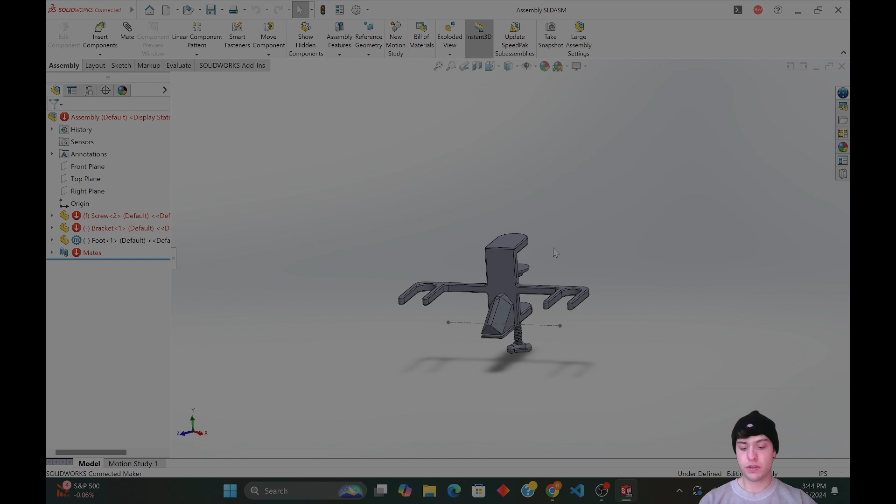Perfect, so we are going to clean this guy up today. One thing I wanted to do was make it look a little less awful in general. So really quickly and easily, we could just open this guy up and fix some of these features.

Big thing I was looking at was extending this fillet out to have some additional features. You could pretty easily just round these guys out.

You as well. You too.

It's probably not going to take to all of these. We'll see. Let's see what happens. And nothing, doesn't work very well.

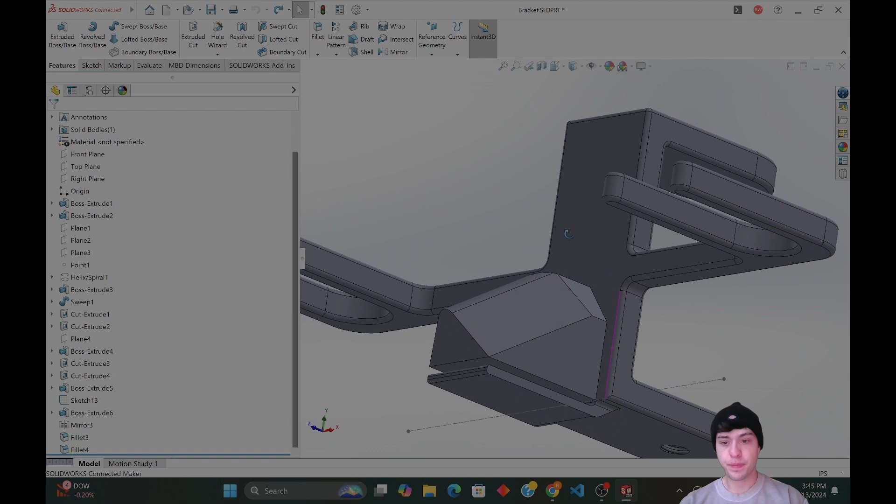So how about instead of editing that feature, we just make this zero, make it a little bit bigger. Then we can add, let's hide that sketch real quick.

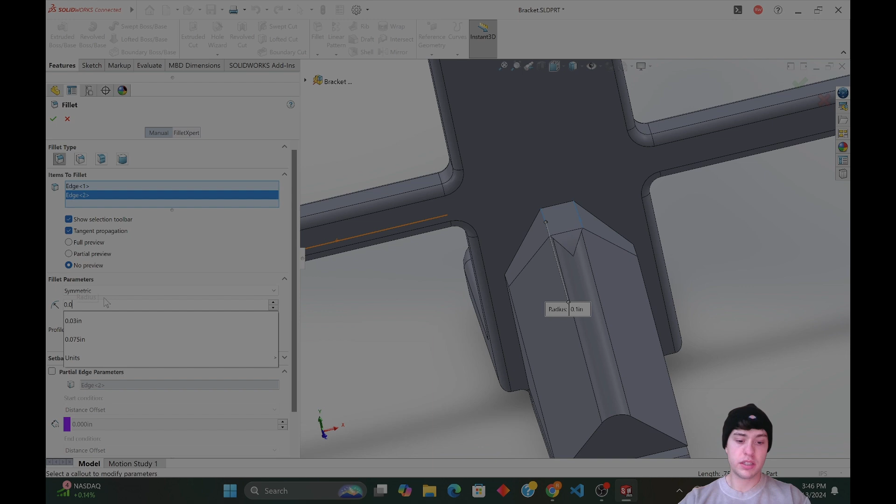I'd like to really round these out a little bit more. So let's fillet you and you, and let's drop this down to 0.075. Let's just see how that looks.

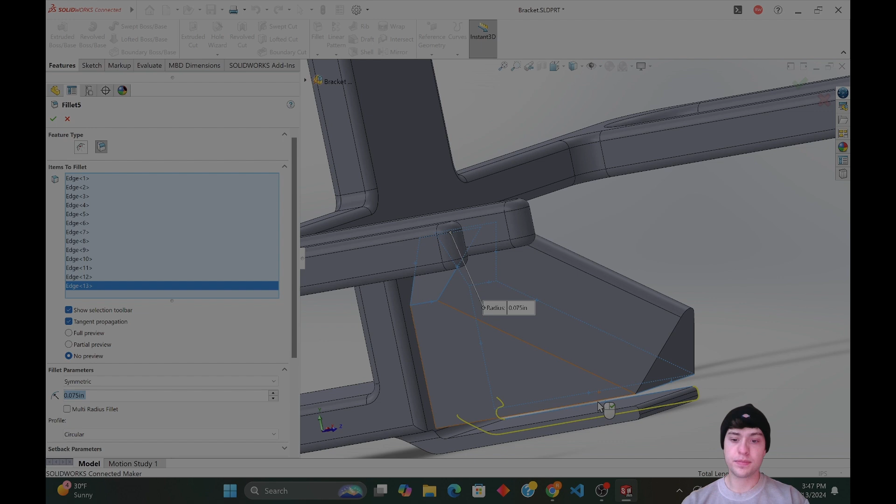See what that looks like. Common corner faces. Okay, so is it this thing that you have a problem with?

Probably these guys. I had to guess. Oh, we don't want that face. And this. Cool.

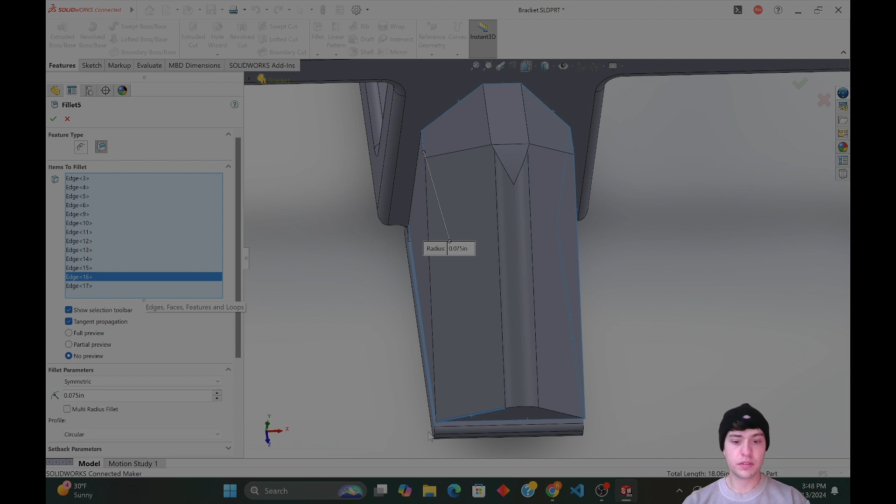Let's see if that works. Does not. Ah, turns out it highlights it. Ah, what happens if we do that? Does not like it.

Is that not about you?

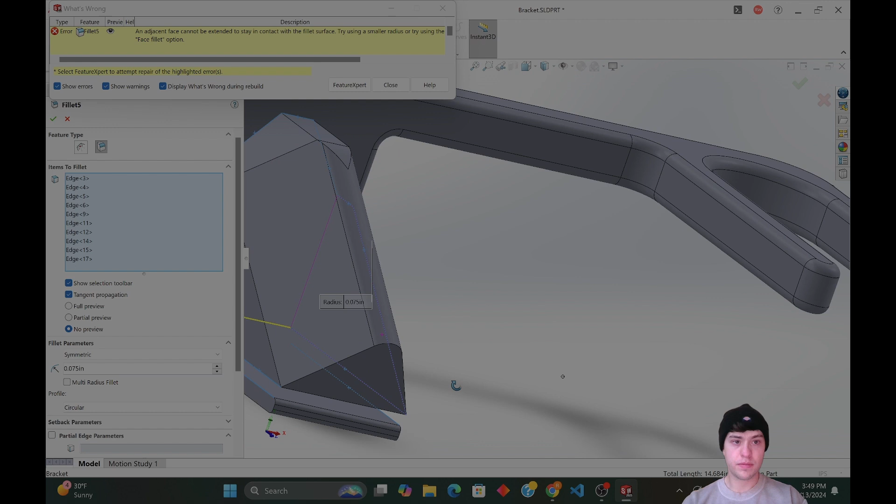Seems really picky. Well, scratch that, we're not doing that right now.

Maybe we can edit that geometry with our actual sketches. So those features were cut out here. Let's edit this sketch a bit.

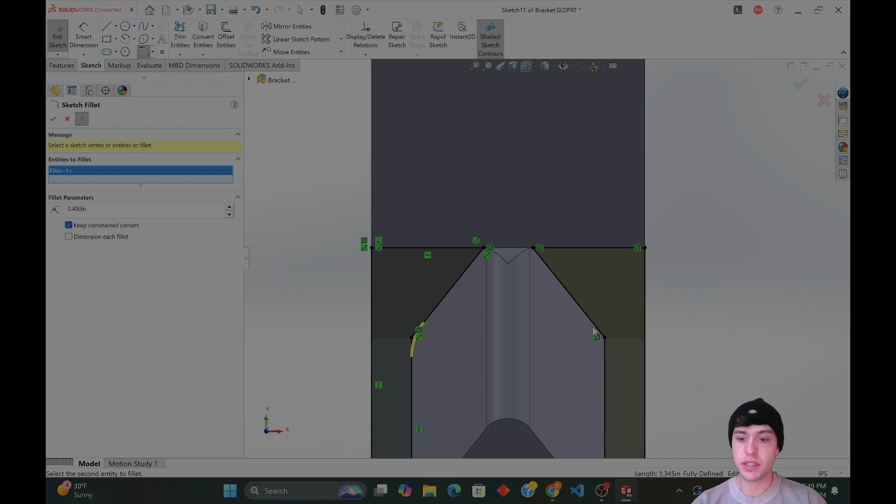Yeah, and we can go fillet right in here, between those two, spread out a bit. We'll add those, trim away. Oh, we don't have to trim anything. Kind of like that.

But also, I think I'm gonna do away with this geometry here. I think I'm going to kind of...

You two are going to be tangent, and you two are going to be tangent. Cool. And then we're going to do something like that.

So we actually want these to be tangent as well. I'm trying to smooth this thing out here. So then we'll drag our line. We'll trim this guy away.

Trim you, trim you, trim you. And then these are symmetric right now about that. Get rid of this coincident. And we'll just drag these two.

Actually, we can probably just say that these two are tangent. Oh, that's not good. So this and the origin need to be vertical. Cool, now we have an enclosed thing here.

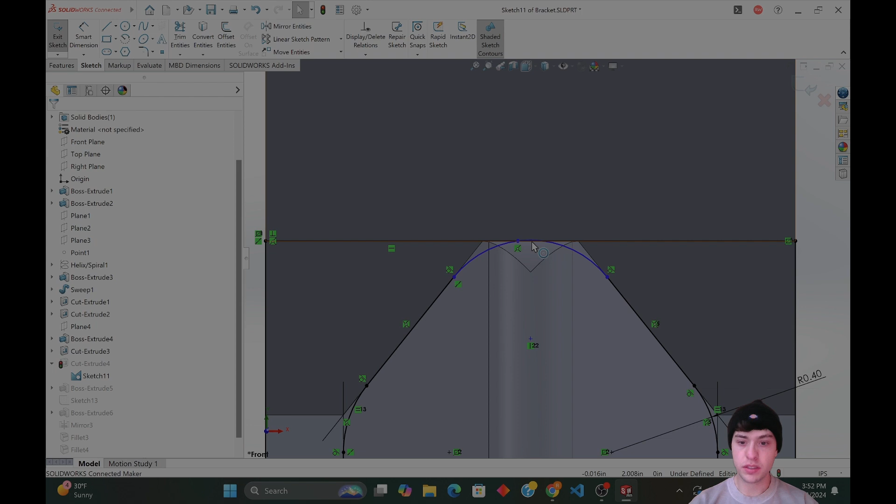Actually, I lied, I don't want this to be tangent there because I want to pull this away from this edge a little bit. They're no longer coincident. This thing is also going to be vertical with the origin.

You know what, why are we complicating things here? Just get rid of those and make this one line. And we can say that these two are going to be, sure, 0.45. Now if we go through sketch here...

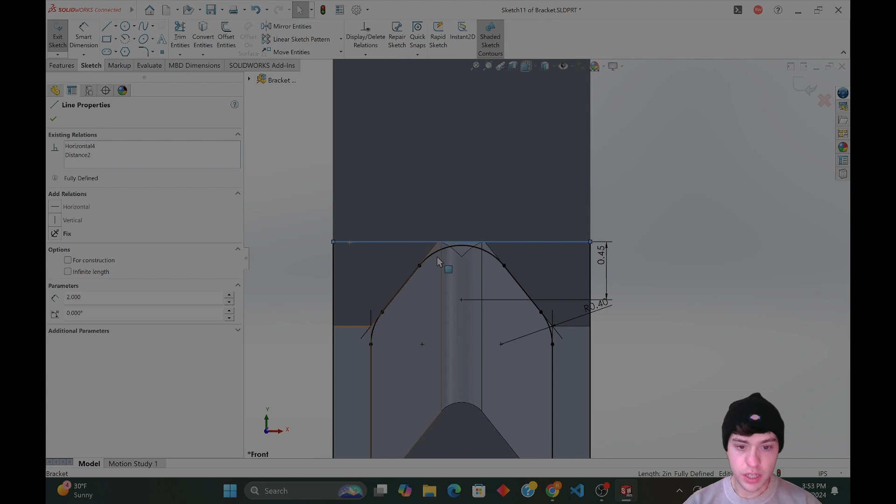We have... show me where the problems are. How much of this are we gonna have to redo now? I feel like a lot of it.

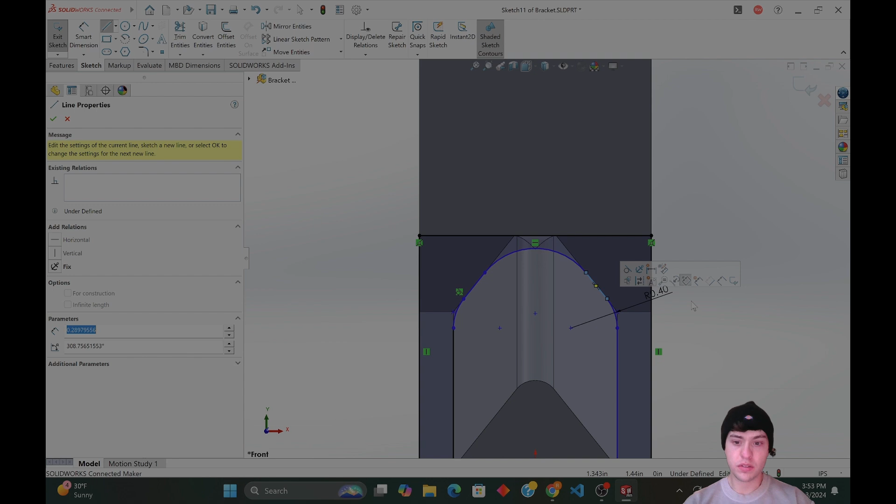That wasn't the issue. There we go, so there's just something weird in there somewhere. So these two are equal. And let's set this radius again, or this distance here, to 0.45.

Oh, that's not what we want. We also want these guys to be equal. That's not what we want. We also want, let's back it up right here.

So these two are going to be horizontal from each other, so that should lock that in. I guess I could actually make this really easy and do a center line here.

So I can say everything is symmetric about this, so you guys are all symmetric. Symmetric. You guys are all symmetric. Well, so now what is this mad at?

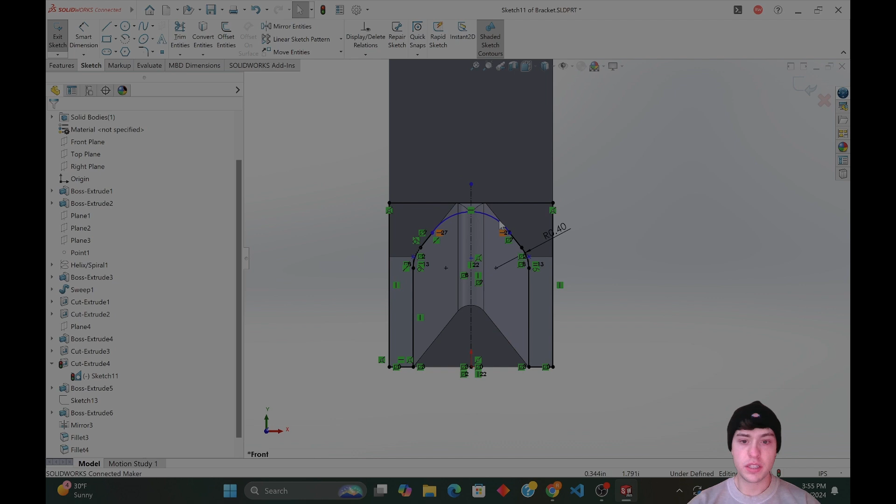We also need to make these lines collinear with these. So let's go collinear. That's all locked in. Cool, cool, cool.

These actually can probably just get deleted, they don't even matter anymore. And this thing, we can just make this pretty easy actually by just saying that these are tangent.

Cool, and it's still mad about distance. And we decided on 0.45. And it looks like it's not enclosed. So let's see what the issue is.

Well, I guess we have to go through this again. What if we make our lives easy. Oh, you're now collinear, and you guys are horizontal. Happy, happy.

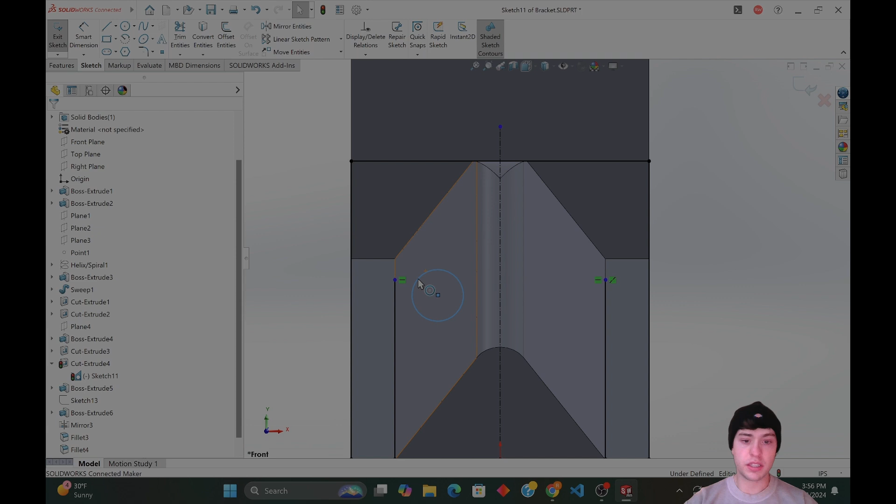This is going to be tangent to this, and here. This guy, you guys are going to be tangent. And then you're also going to be touching that thing. Cool.

And trim these away. And we'll set a circle here and make these tangent. Just before we forget, we'll make this thing collinear.

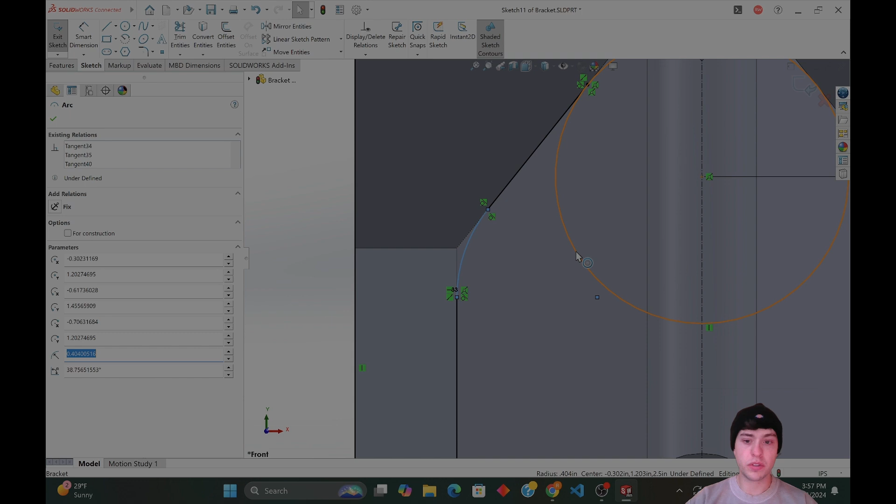And smart dimension this, 0.45. And you two should be coincident. And how crazy would it be if we made these two equal? Does it break everything? Not at all. Perfect.

Cool. So now we say mirror. We mirror you guys about, whoa. Mirror you guys about here. Wow, that took way too much work.

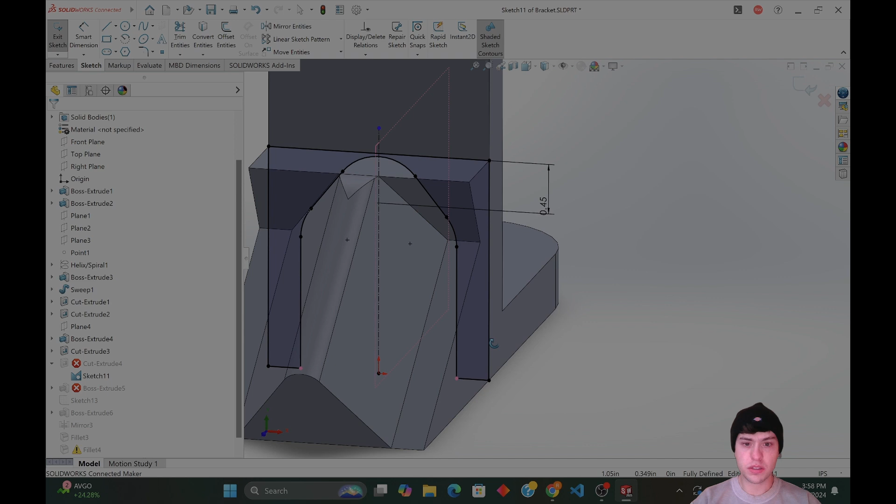We don't care. We do care. I wonder why this is still mad. What are you mad about? If you shrink this down a bit. Oh, no, a little bit bigger than that.

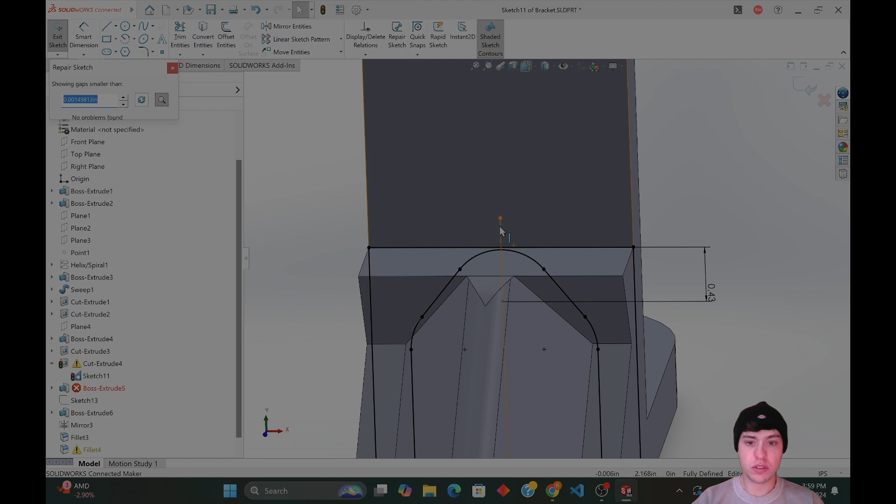This is mad. Multiple disjoint closed or single open. Where though? Doesn't help me at all if it doesn't say where.

This thing is freaking out. Okay. Do we even care? Do we even care to round these things out? It's hard to know.

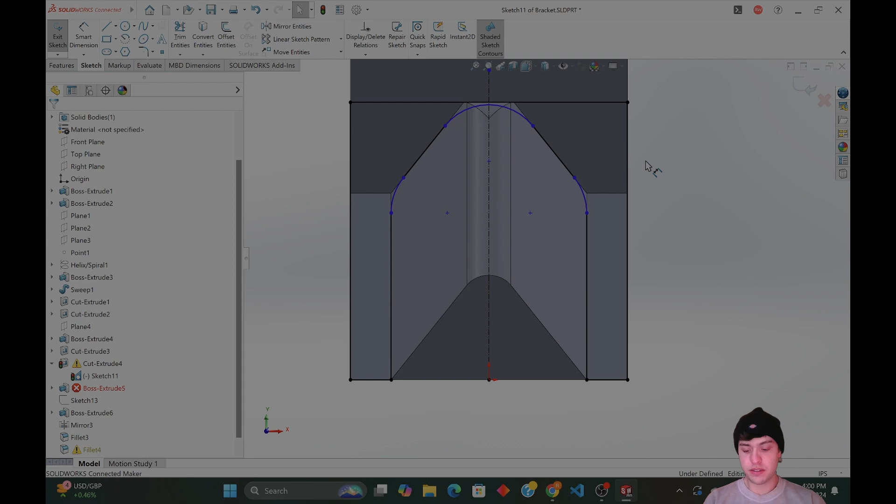Okay, I think I'm going to brighten this guy up a little bit. Let's go with filters, new color correction. We're gonna brighten you up. Sure. How bad does that look? Let's see.

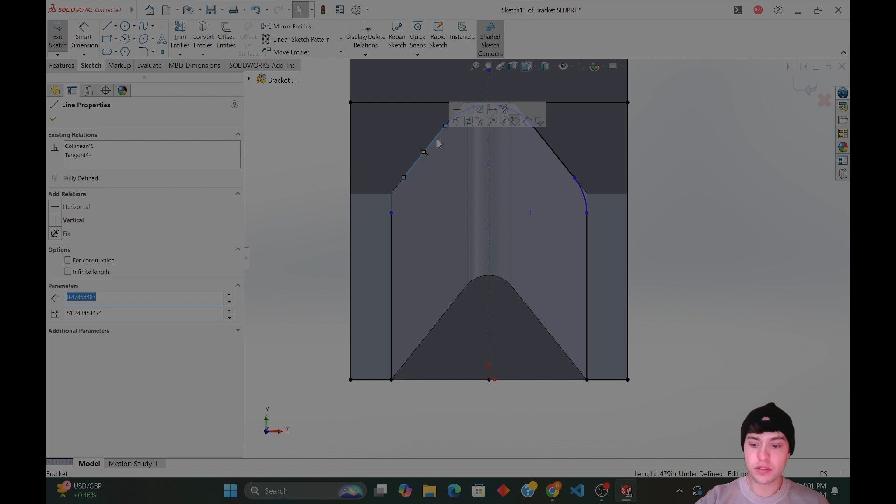Tempted to just do something crazy like this. And then make these guys and this guy coincident, and we drag this up.

You're enclosed now. What happens if we do this?

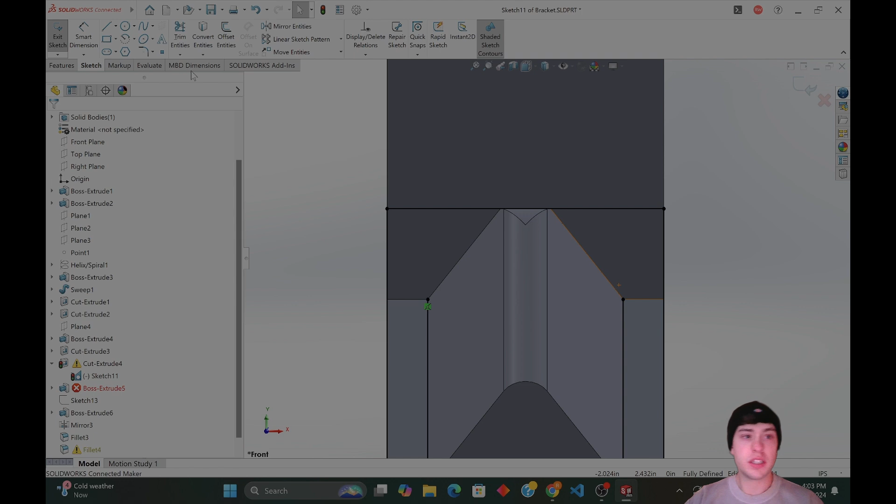Really doesn't make any sense. Okay. All this is a waste of time, I guess. Let's just go back to our straight line approach. If you touch here, we'll come up like this. Maybe we'll just do this.

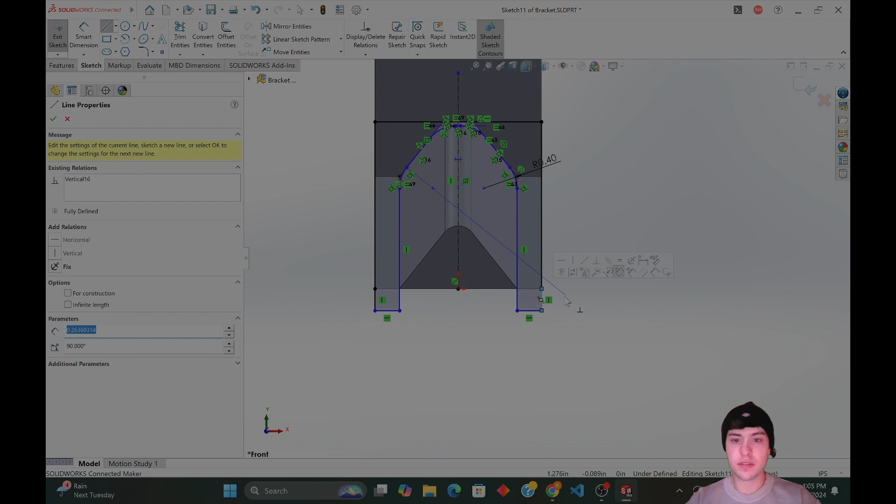If it was just the fact that these were not enclosed somewhere, we're just going to be extra careful here. See if that does anything. Do I have anything?

Okay, we're just not going to save this. We're going to reopen it. So I still don't fully understand what's happening.

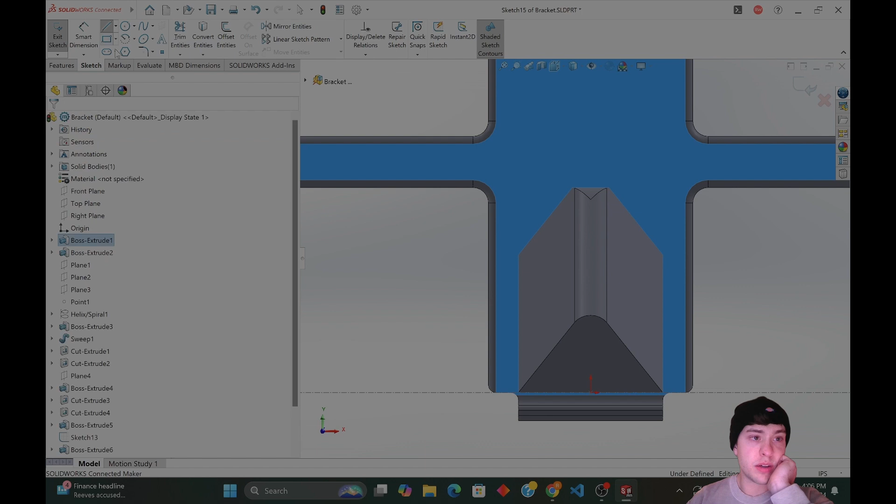So instead of dealing with that headache, what I'll do instead is be lazy and sketch on here and trim away the extra stuff that I don't want to deal with. So we'll do the same thing we were doing before, a rectangle in from like here to here.

And then we're actually going to trim away this guy and put some lines in. Vertical. You're going to be, you, and you are going to be collinear.

And we can do this now. We will actually get rid of this and do what we were attempting to do before. So again, I think the easiest way to do that is to make all of these on the sketch here, horizontal.

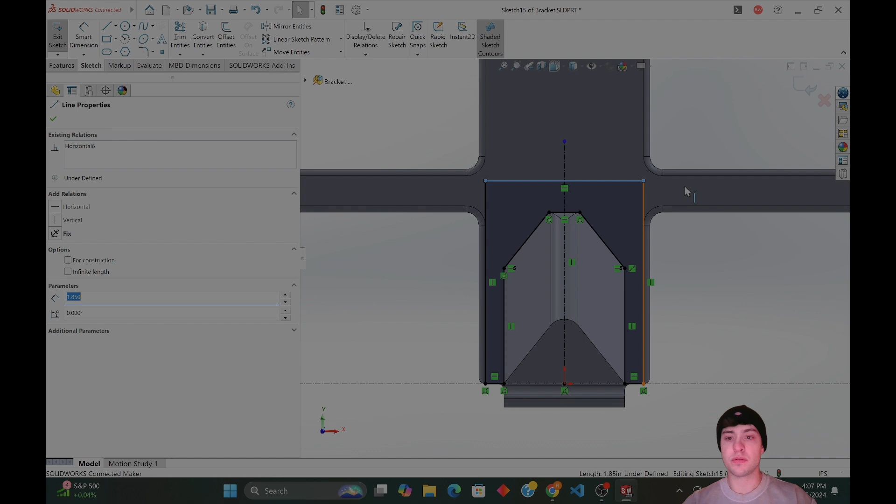Same thing. I actually don't care about this dimension at all because there's nothing on his face that's going to interfere with it, so I'll kind of just leave it for the time being. And then we're gonna, oh, that's too big. Let's do 0.1. Get rid of this line.

Maybe 0.2. Maybe 0.3. Sure. And then we should be able to, now we should be able to shoot a cut and get rid of all the garbage that I want to get rid of initially.

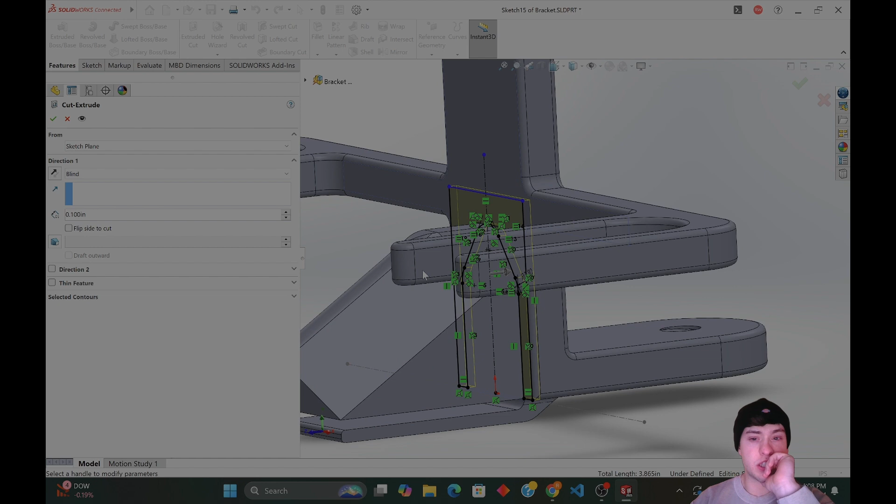Cool, and we'll flip the direction and we'll go up to vertex. Pick that guy. That's cool. So that rounds that out nicely.

And I wonder now if we can just throw the fillet that we want to throw on before. What does that look like? Cool. I actually might increase that size a bit, and we'll select some other contours here. See if it gets mad at us now.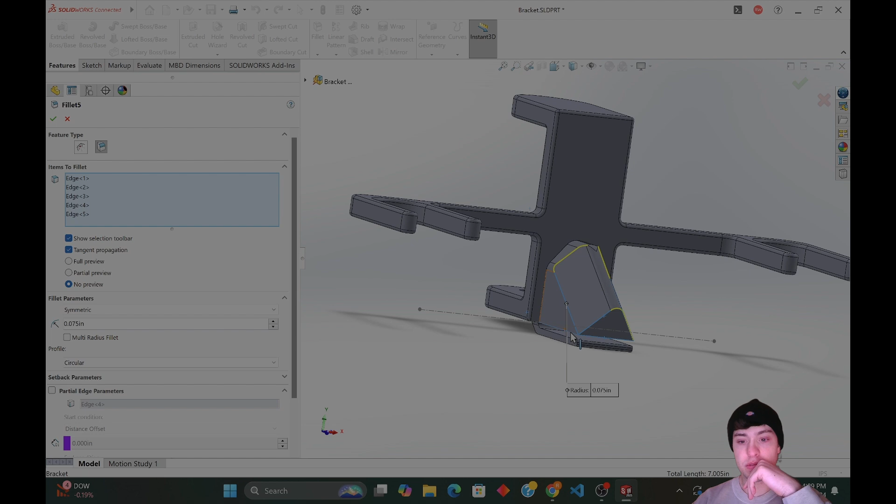Make that 0.1. Is it mad? It's mad. Okay, so we won't select these edges. Then we'll see what happens. It's really upset about... what feature is it mad about?

Okay, whatever, that can be a flat face. Not super worried, I'll grab this guy too. Cool. Cool, cool, cool. Okay, I'm not mad at that. So that's cleaned up a bit.

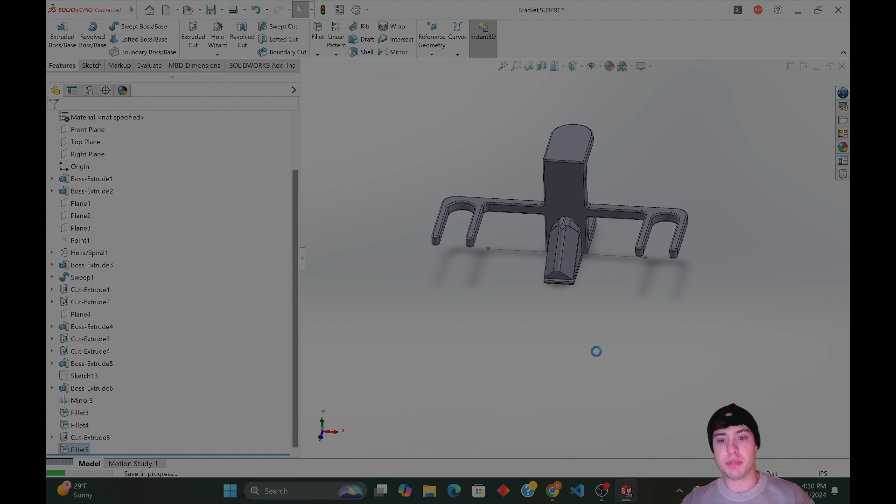One thing I was thinking is that I am not sure how I feel about this being like... so the idea is that the nose rest of the mask of the MetaQuest 3 will grab onto the surface here. So I don't know how I feel about that just being kind of like a friction hold, because the second I bump that or shake my desk for whatever reason, it could fall off possibly.

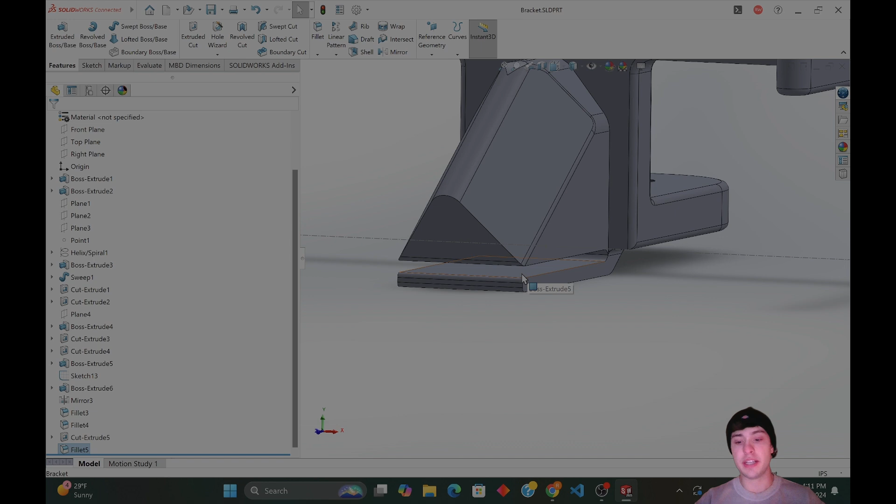Unfortunately, I don't have my Quest with me, but we'll mock up some solutions to that. I actually think that if this is dimensioned correctly and the strap for the headband is set at the right length, this should provide enough friction force or downward force on the mask to hold it in place. But maybe we don't want to rely on just that.

So I know the mask is this wide. This is my reference line for the size of the mask. So what I'll probably end up doing is making some little tabs here, almost like little detents that grab the side of the mask.

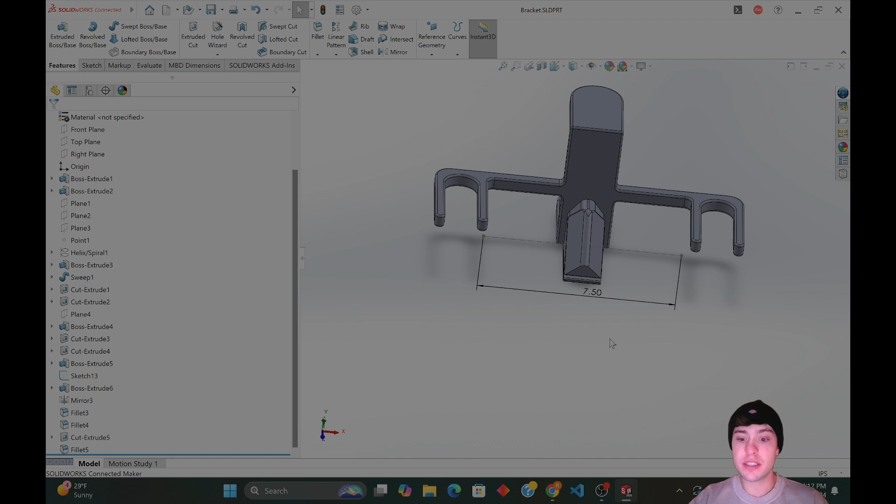Or maybe we don't even care, and we double check that our screw geometry looks good, and then we'll test print things. You know what, I like test printing things. So let's go to our assembly.

We'll rebuild our assembly, clean that up a little bit. Everything looks a little bit nicer. I'm still kind of happy with how this foot and clamp design works. Realistically, I could... oh, you know what, that reminds me, I actually did have something else I want to change about this.

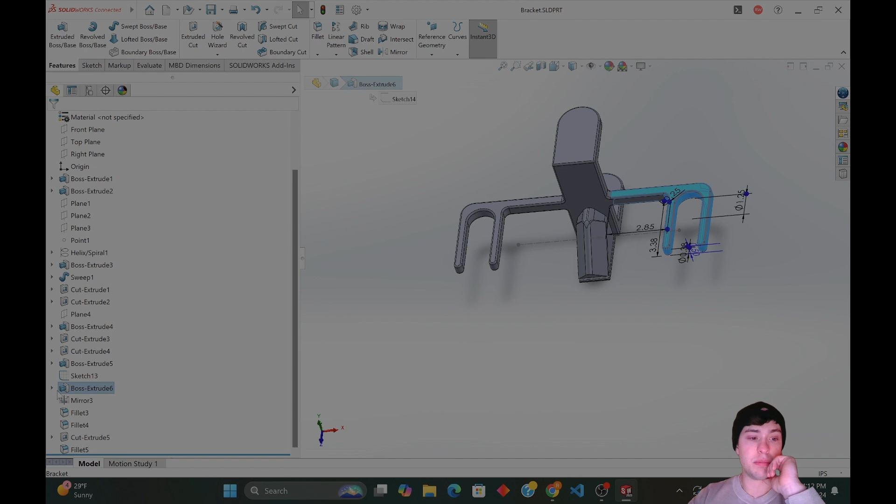I want to taper these a bit. Those little arms there should be tapered because I don't want this when I mount the controllers inside this arm. I want it to guide in nicely, and I don't want to have to press the button down as I press the thing in. I want this tapered so the button on the controller presses as I insert it into this slot.

So what we'll do is, what angle do we want this to be tapered at? What we can do, I think, is just make a vertical line, and you are going to be vertical, cool. And then we'll have an angle that's guided off of this.

Let's dimension this thing at an angle of, let's say, a 5-degree taper. Nothing crazy. If everything is designed correctly, I have all these set as vertical right now, so I should be able to get rid of all the verticals and tangents. Actually, we keep the tangents.

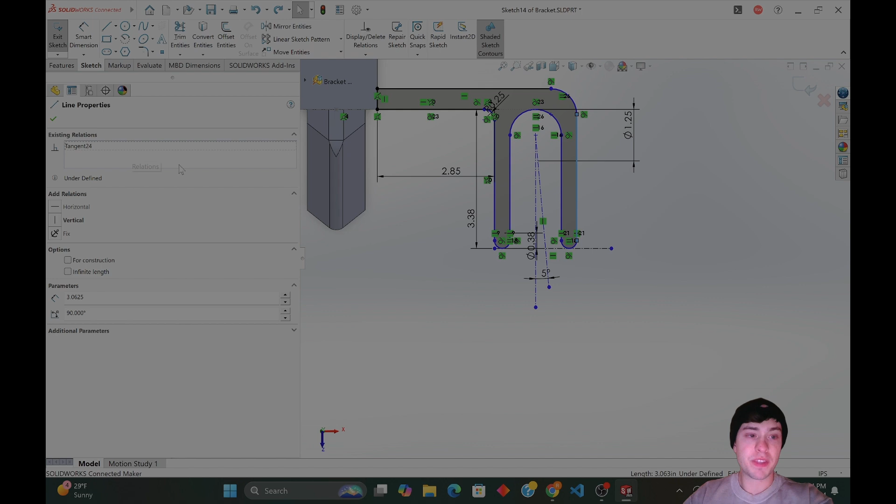We'll get rid of all the verticals. Oops, not the line, the verticals. So these lines should no longer be vertical. And what I can say now is that if I throw a center line in here, this thing should... oh no, we don't want to do that.

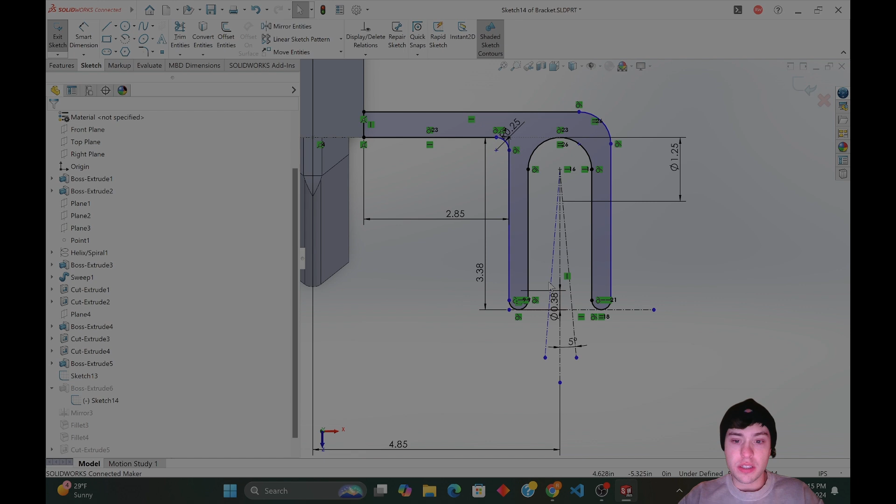So let's dimension this off of the origin. Works for me, that's dimensioned off the origin. Let's say that tangent, tangent. It's this intersection—oh, that intersection's gotta go. Now I should be able to say that this is symmetric.

Is there a way to add a relation to... oh, that's how I want this endpoint and that endpoint to be symmetric about that line. Cool, so now we have our 5-degree taper. And if all goes well, I'll probably have to delete this dimension and make sure I just define this.

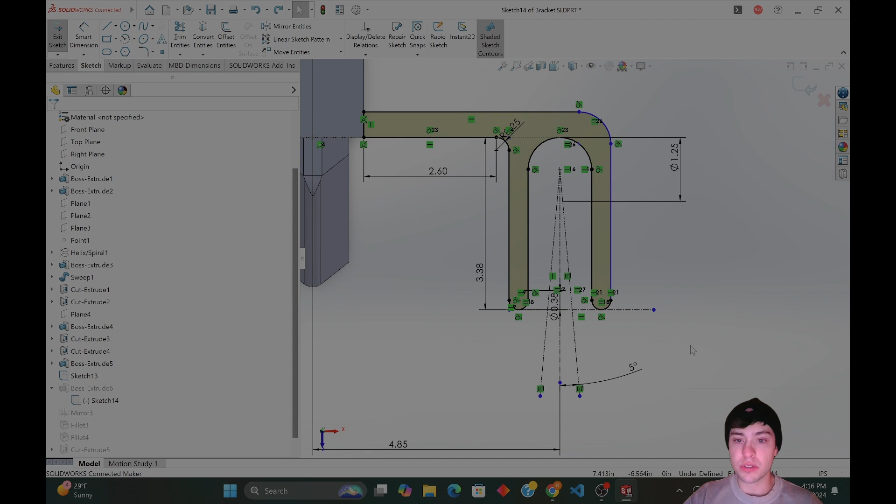And what happens if I say that these are parallel? Everything breaks. Cool, so something's over constrained here. We'll delete that. Cool, delete that for now.

Now you should be tangent to this. What is tangent? And this guy. Cool.

So now I can probably go here and say parallel. And this is also going to be parallel. What are you parallel to? Why are you not parallel to you? Why are you mad at that? What relation does this have? Or are these symmetric?

Now we know that this thing can't be tangent with that if we want this to look right. So, can I select 3 at once? I can—parallel. Cool, so I'm kind of happy with how that looks. It's a jumbled mess right now with relations.

So just for some background, some rationale behind why I do everything the way that I do: as a wee young engineer, back in the day when I was doing my first internship and job doing mechanical design, I would never drive anything based on relations. I would always dimension everything. But I think the intuition you develop by setting everything to be dependent on relations to each other, like tangent or equal to or symmetric about, gives you a lot better design intuition.

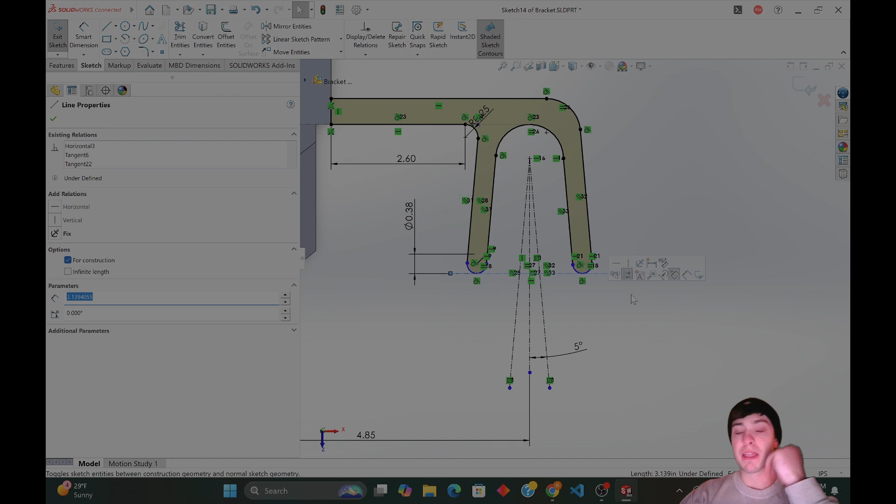So you don't need to be super explicit with how you define things, so you can be more rapid. If all these things are related properly, now I can set up a system where I can really quickly make modifications to one portion of my design, and I don't break everything else in my design.

The worst thing to do is to design a full assembly like this, and then go into one of your parts where everything is explicitly defined and not related to your other drawings or sketches. If you change one thing, it could break several things down the line, which is kind of what you saw when I was trying to fillet this edge. You want everything to be related correctly.

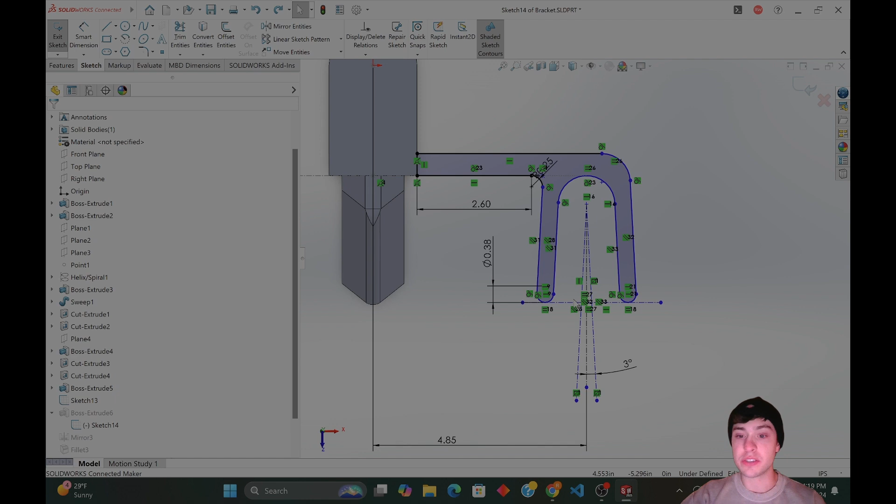So now that all this is related nicely, I can just change this value and everything updates accordingly. I can, in real time, look at this and say, oh, I kind of like... not what I want to do. I could say, oh, I kind of like what 3 degrees looks like, which is true. I do kind of like how 3 degrees looks. And this distance here, while it's not defined, I think we can kind of guesstimate.

Let's say it's 3 inches. That's probably even a little too much. So let's say 2.5. Um, I lied, we're gonna do 3, because why not? Cool.

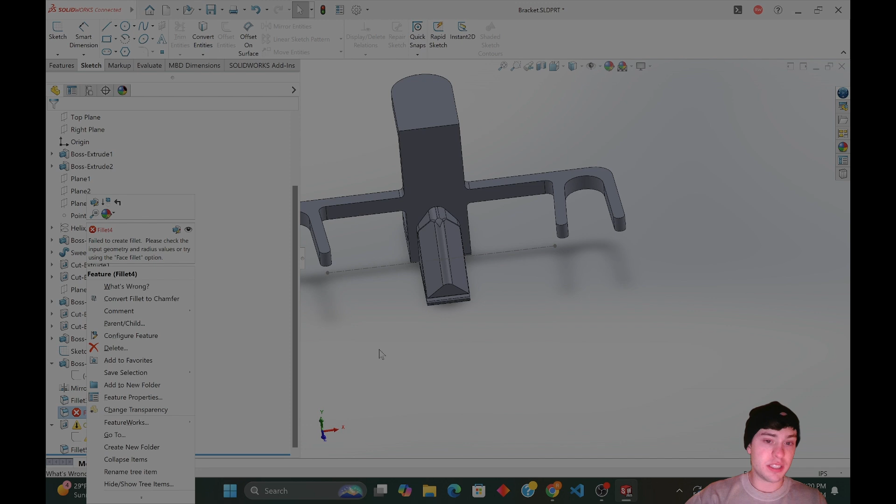We broke a fillet, as I mentioned before—we do all this so we don't break fillets or other features—and we broke the sketch. This fillet is probably dependent on a face that we just changed. So if I edit this, it's gonna tell me, ideally, what it doesn't like.

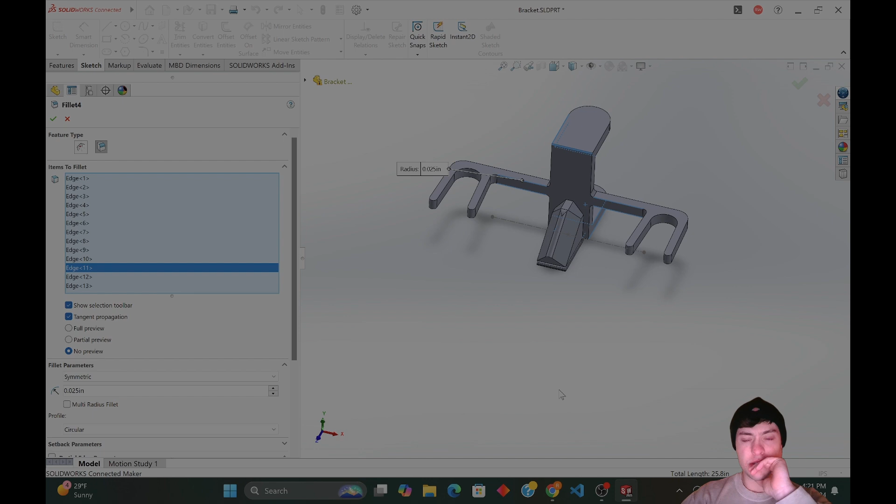I think it's because... let's try reducing the fillet size and see if that unbreaks it for the time being. All right. Instead of really trying to unbreak this thing, maybe we can pull it down, can't reorder.

So what is broken? Let's try deleting some of these—not those. Let's try deleting, just incrementally delete faces or delete edges until this is happy. Let's see if this is causing it.

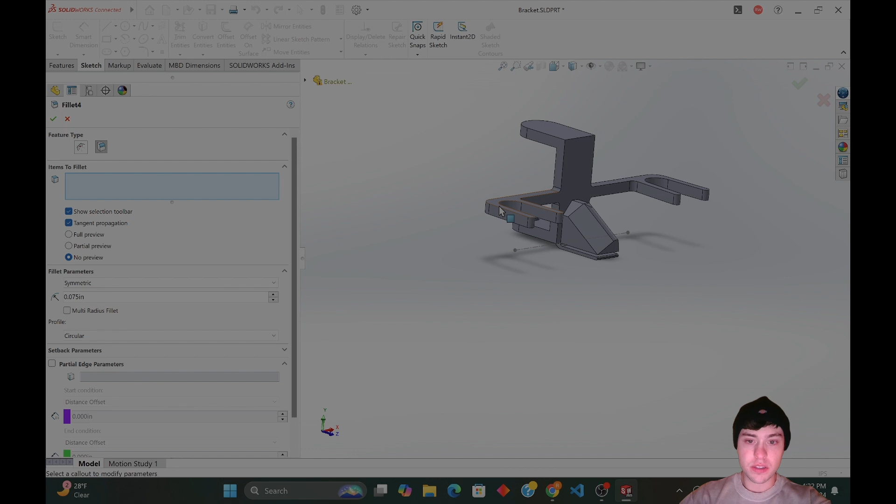Bingo. So why are you mad now? Oh, okay.

So instead of the edge, we'll select these faces. Works for me. And then grab you, you, grab you, and we'll grab you. I believe that was everything we had done before. Nope, we missed this.

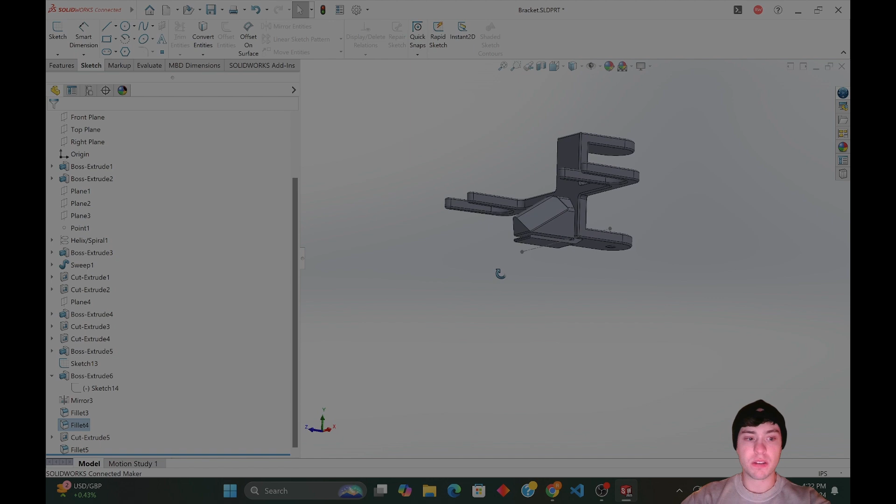Sweet, so now we're kind of where we left off, and I'm a little happier with that. So actually, what may end up happening—again, because I don't have the Quest with me to grab these dimensions—but maybe because of this line, I actually think the Quest is just about 7.25 inches long or wide, if I remember correctly.

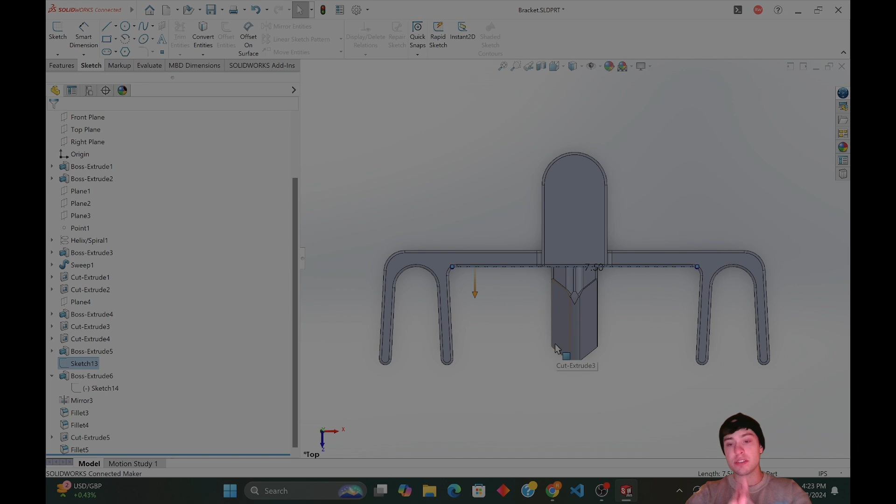What may happen now is these little tabs here, these little fingers that are meant to grab the controller, may also work to compress against the sides of the Quest and retain it, so you kind of snap the whole thing in place. We won't really know till we print this thing, but I'm kind of happy with how that looks.

Let's see, we might as well select a material on this, because we know it's going to be PLA. Do they have PLA? They do not have PLA.

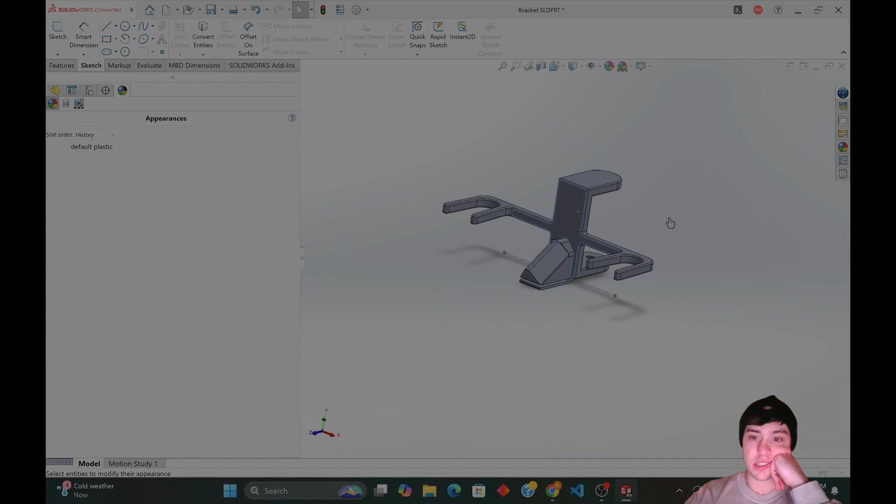So I only care about this for an aesthetic reason. Let's just select a similar looking plastic, which normally Nylon 101 is pretty similar looking. And we'll adjust the appearance—just the appearance of, I think, this whole face we should be able to do.

What do they have here? Texture? Ooh, I kind of like these, something like that. Okay, actually, instead of just doing that face, I should be able to go here and edit appearance. Ooh, now we have a nice, pretty, kind of gloss black representative view of our bracket.

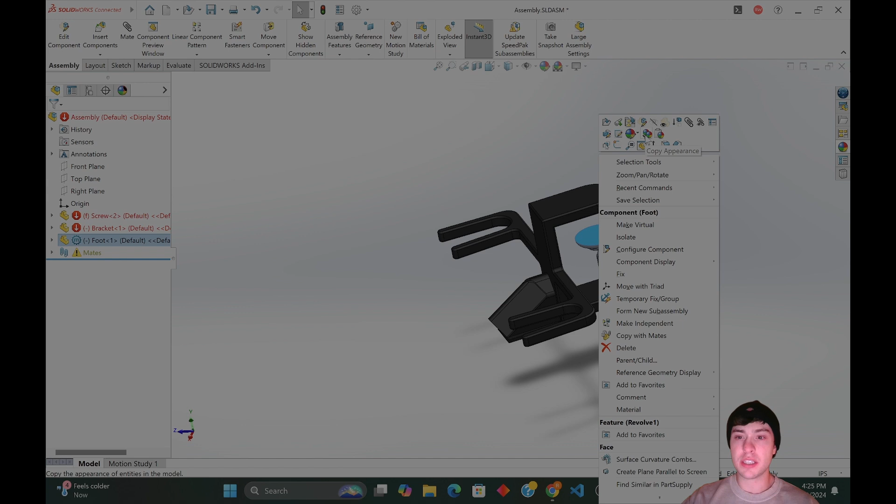Save that, go back to assembly, and modify the appearance of these things. So I should be able to go copy appearance and paste appearance. Maybe not... paste appearance. Ah, there we go. Bingo, so this is actually what this will look like.

Pretty close. So now that that's a little bit cleaned up, what other things can we add? I really should take another look at... let's see, right click. Let's do a section view of this. And select.

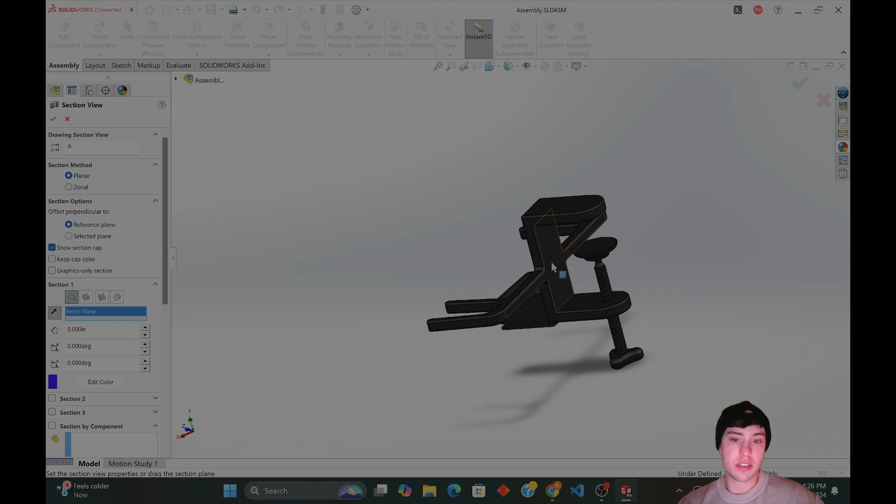Oh, our position got all mixed up. Okay, what mates do we break? Concentric.

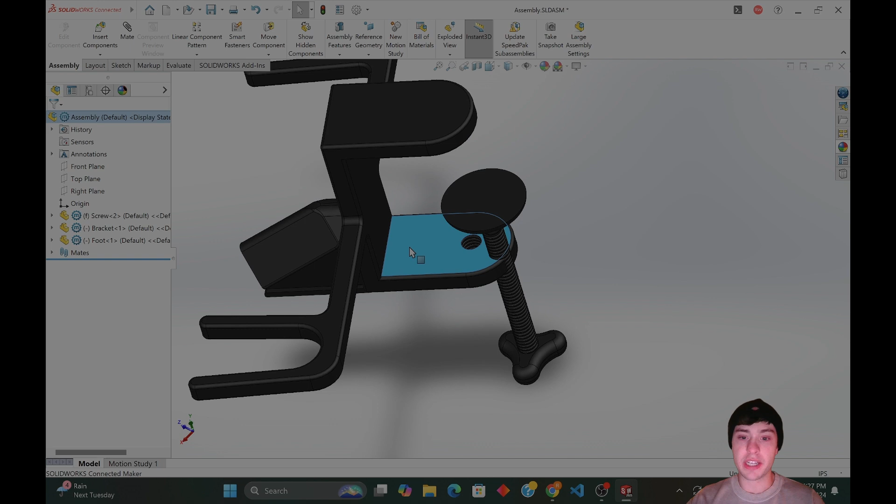So we know what we can do to ensure that our screw is properly centered relative to our threads, just to do a visual check on whether or not our threads will mesh correctly, as we can say that this guy and this guy are concentric. Unfortunately in our model we won't be able to move that around anymore, but I just want to check to make sure that our threads mesh up well, because we did design these threads ourselves.

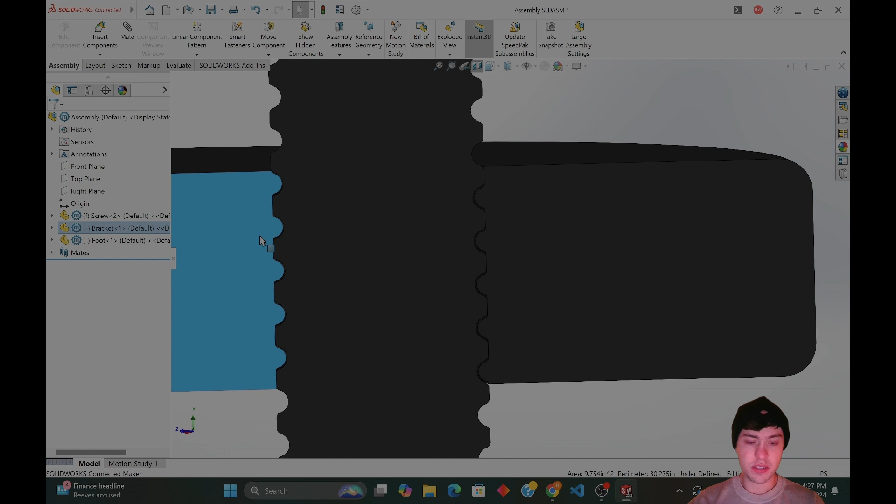Let's flip you around, I want to see. Let's zoom in here. So, yes, one thing I did want to do, because that's line to line right now, that's a big problem. And I think that's what's causing that. Yeah, that's what it is, it's because it's line to line. So that's an issue, and I'm glad I remembered that we did it that way, because that's stupid.

So what we can do in our bracket here is we had this hole cut, which I think we can just pop in here and say, instead of being a half inch, you're going to be 0.51. So now this is 10 thou wider than the shaft, the major diameter of our screw thread. Major diameter is, let me just check features, where's my rebuild button? Rebuild and save the document.

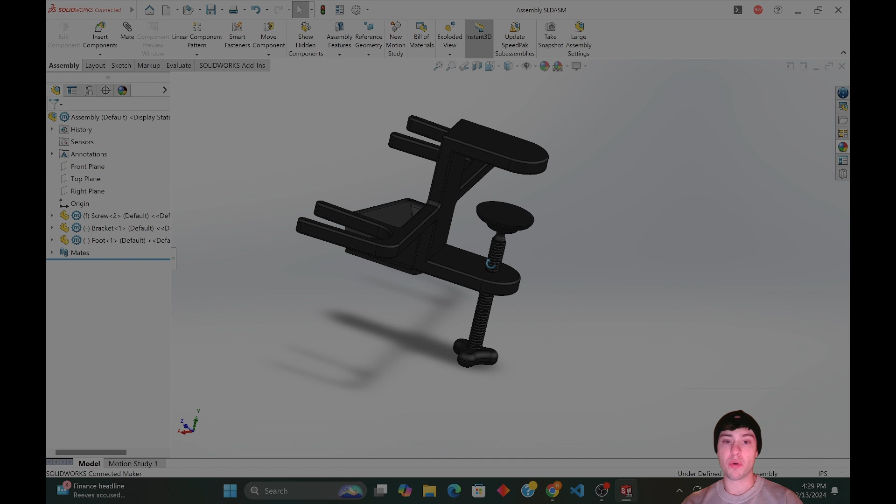Okay, if we go on our assembly, I can show you what I'm talking about. So before, how this was set up was that the maximum diameter of this thread, the edge of this profile, was the same diameter as the mating surface of the receiving side of the threads. So that means that because nothing is made completely perfect, even if it was, you're going to be having those two faces ride against each other as you drive these screws into place.

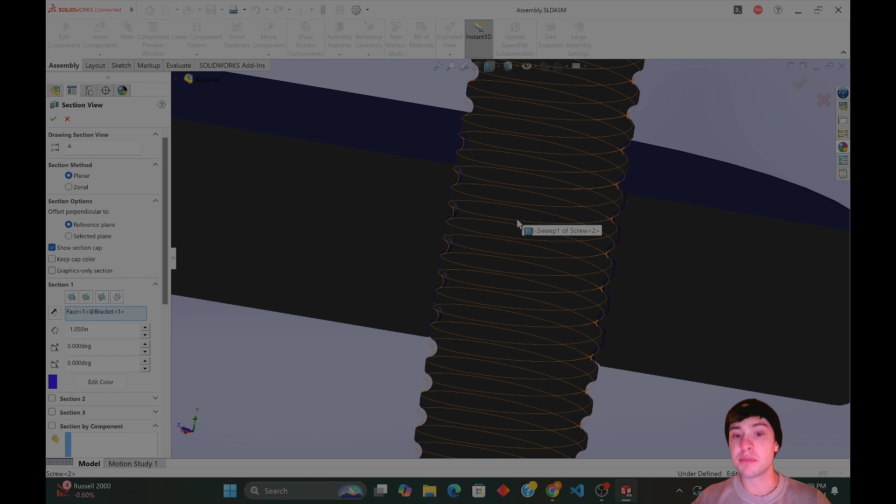Again, 3D printed, we want to keep like 5 thou tolerance minimum, especially with the kind of 3D printing I'm using. There's SLS 3D printing that's a little bit more precise, but I'm just using an extrusion based, I believe it's FDM 3D printer. So that's just a little nozzle with some hot plastic coming out the tip of the nozzle, and it goes around and traces the path of the print.

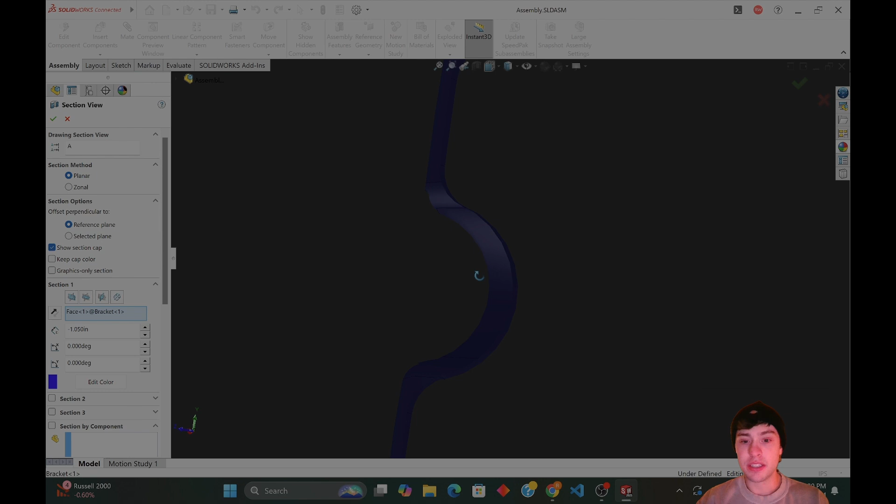So I actually left a 10 thou gap here, and what I actually want to do now, since I increased that gap, is figure out if I'm actually okay with having these radii be different. I think what I want to do is make the radius the same, because everything in the bracket for this thread is driven off the diameter of the first extrusion.

So I may be able to go in here and say that this sweep, let me edit the sketch, wherever the hell it went. Yeah, okay, let me go normal to, what face is this? Where's my... there we go.

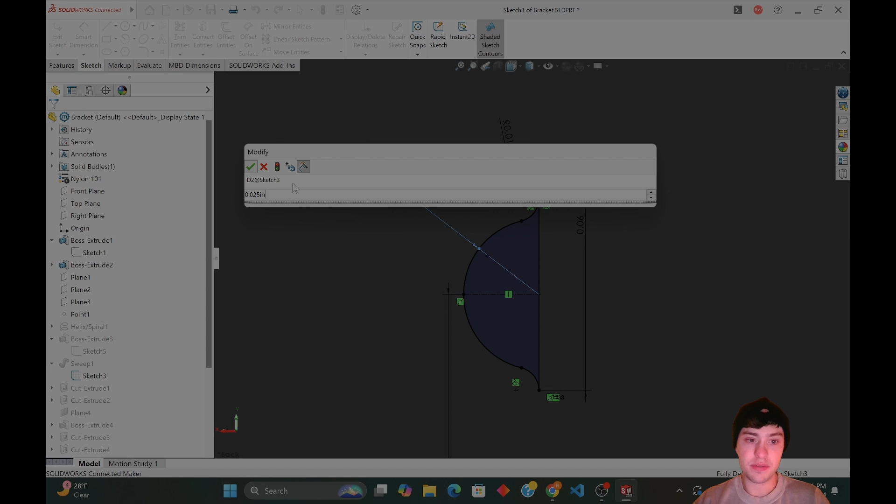So now we can say that this radius, because we made it a little bit smaller before, I believe it's, was it 2.5? Let's just double check. I want to open this part. Okay. Oh, 0.03, 0.027, okay.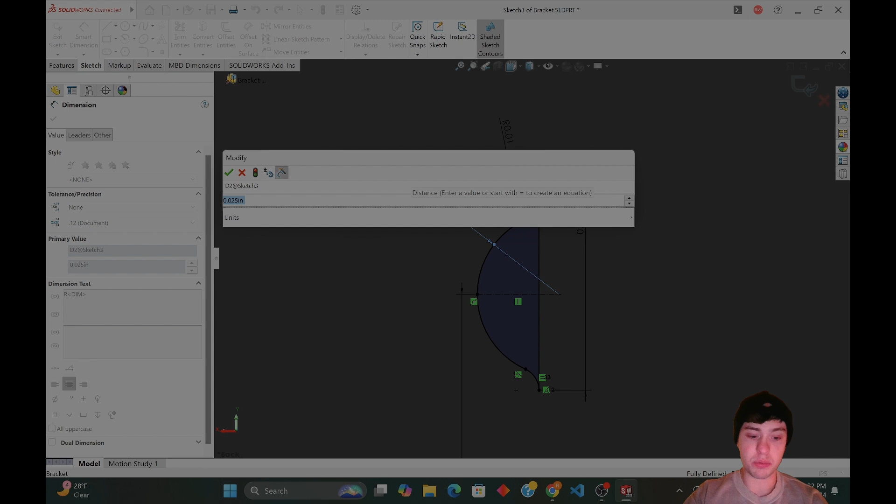So if that's 0.027, I'm actually pretty confident we can make this 0.027 as well. And hold on a second, you need to be a whole lot bigger, and as do you. 0.027. 0.012. So that's going to be 0.02.

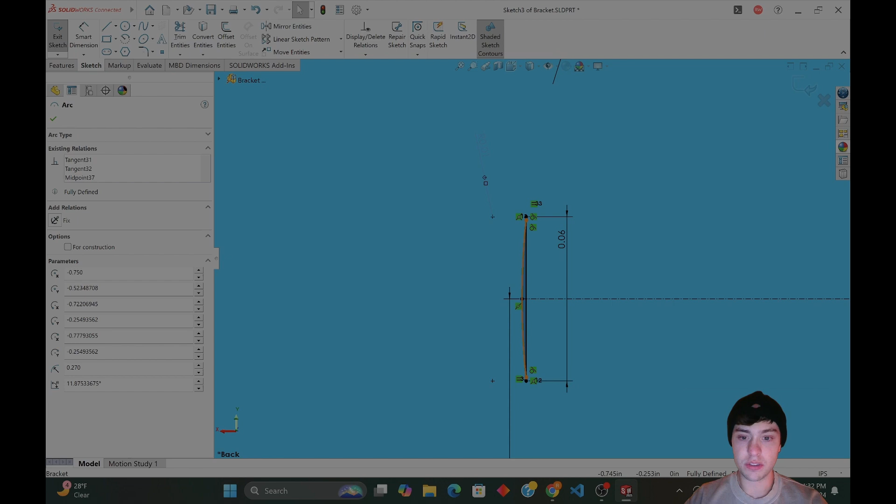So this is all kinds of screwed up. Whoa, yeah, we need this to be 0.027, not 0.27. Fix that, why did that not update? To 7. Cool, so now I'm pretty confident that if we go back in here, you just make sure that these guys are saved.

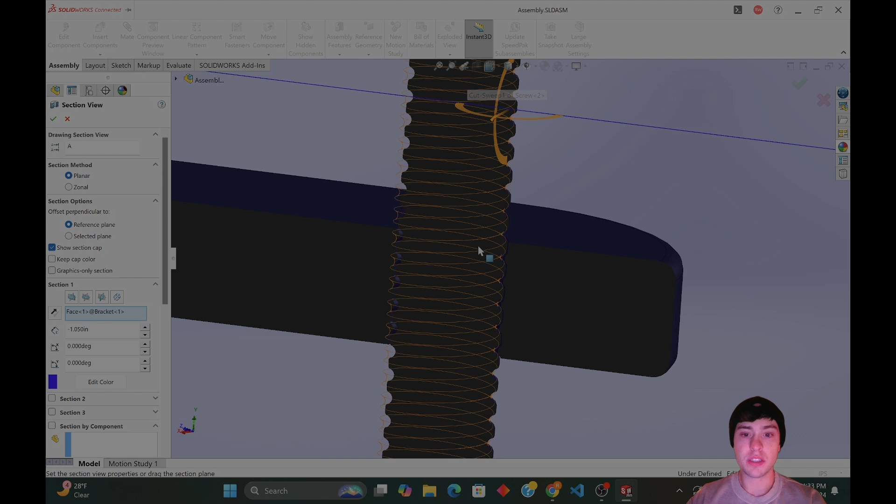Now if we go back into this assembly and we go back to our section view. Something looks a little funky there, I think we need to increase that line length. So that's something that we have dictated on the bracket that is not dictated on our screw. Do we have this 0.0274? How bad is it if we just copy paste?

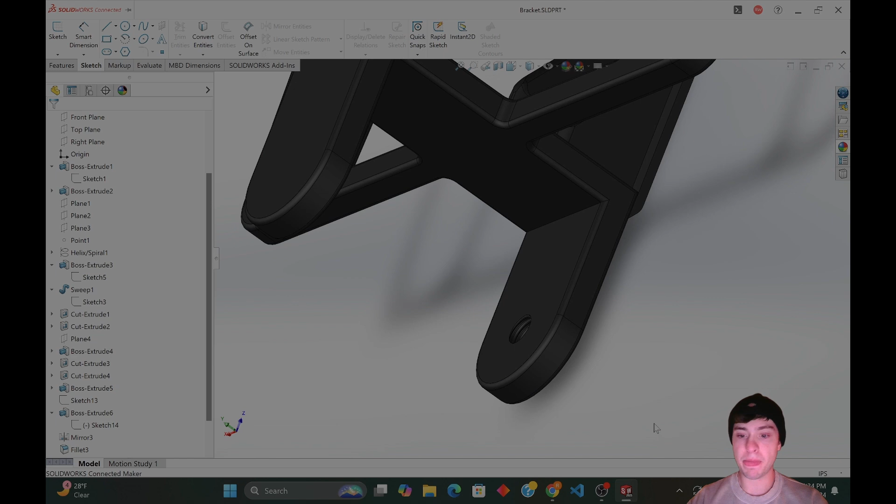Okay, so this should be the exact same profile, just grown out a little bit. Let me save this, go back into our assembly, rebuild it, and go back to our section view. What does this look like? Much better. I'm pretty happy with that.

As a verification, maybe you can't see it, but the normal distance between those two is 5 thou. I'm gonna grow that a bit. I want it to be a little bit bigger than 5 thou normal distance.

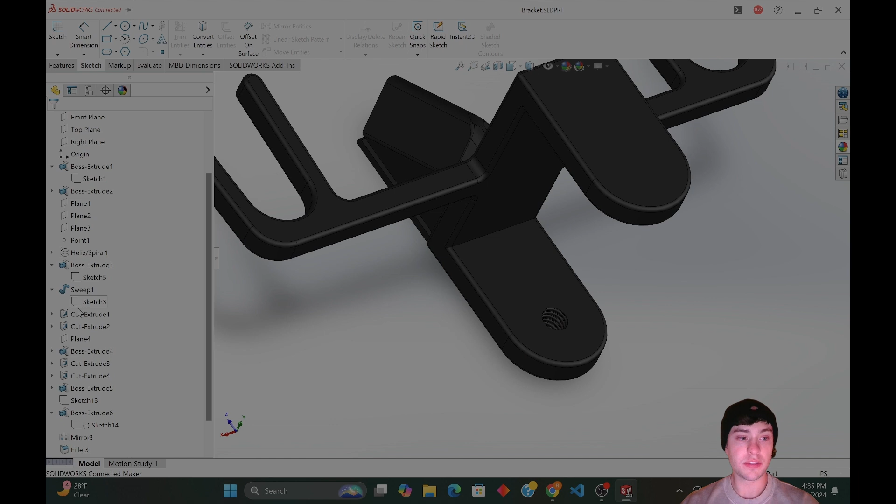So this bracket, go back to this sweep. Actually, it's in this guy here. Let's make this 0.515. Let's see what that does. And we have to save and rebuild.

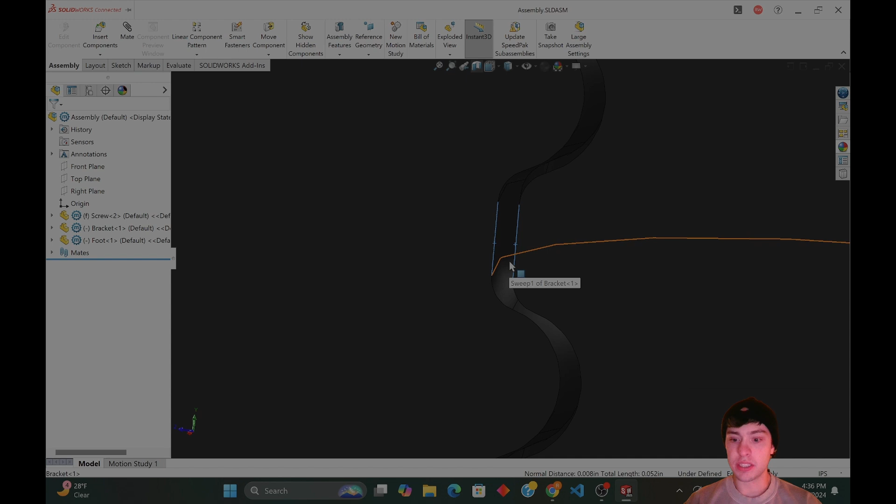Where did my bracket go? Okay, let's make sure we didn't screw anything up too bad. Normal distance is now, should be 7.5 thou, not 8 thou. So 7.5 thou, I think I'm pretty okay with.

Again, we'll have to 3D print this and see how it actually fits together, because typically we look at 5 thou or slightly worse for a tolerance on 3D prints. But these are threads and they're pretty complex geometry, so unless I find a good way to print this with support, printing it on its side, if this just prints from the knob up, that tolerance might actually be a little worse, because the printer is gonna come along the profile here, since it does cross sections.

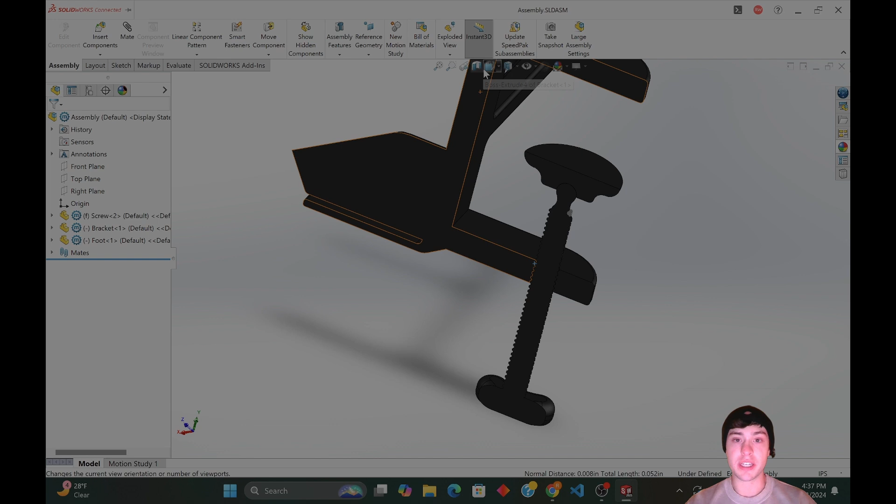So as we're printing, the 3D printer is going to come along this surface here and add one layer of material to this cross section, and just do that until you get your full part. So layer, layer, layer, layer, and it can actually build material laterally without anything underneath it, because the plastic that was just extruded should already be set and no longer in a malleable state. Then you can take the extruder head and come off at an angle to start growing out a profile. So that's something the printer can do.

I don't know how well it will do in this format specifically, so we may have to print this on its side and have the threads print along this cross section here. Let's see. Yeah, so this would be the cross section of the part as it's printing. As you can see, it's a lot bigger, and you can add material as a support underneath the bottom of it, so it'll print on support when it starts to make those threads.

So we'll see, we'll experiment. Support material will probably make the threads a little sticky, meaning there will be some leftover little pieces from the support material that I'll either have to file down or just wear in by using this thread repeatedly.

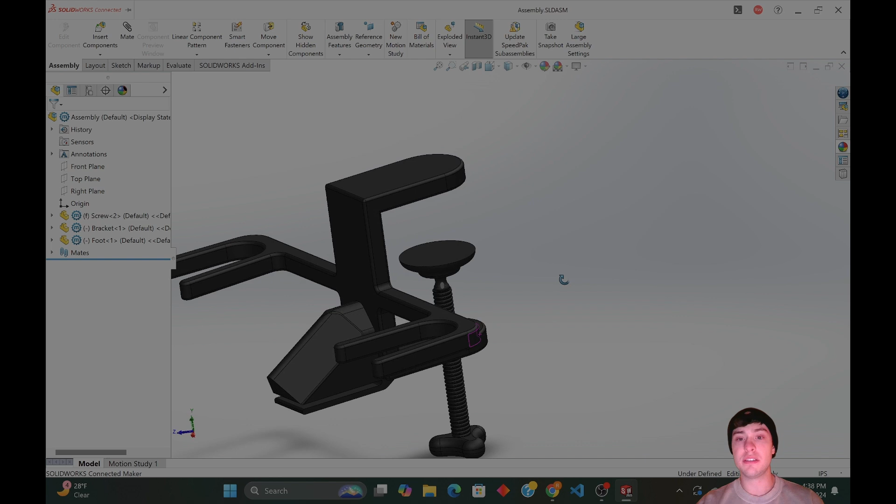So I think I'm pretty happy. I think I made the improvements, I verified the things I wanted to verify with this. Until we actually print this and test it, there's no way to know if this is going to be successful. So what we'll probably do is wait until I have a printed demo of this and see if it works. Then once you have it in your hands, you can figure out how you want to improve it from there. So that will be the next design step.

And this is actually exactly how the design process works in the real engineering world. You design something that you think will work, you get some real actual physical pieces in your hands, try to build it, see how it works. I'm actually a manufacturing engineer, so building it is my forte. And I'm not going to be building a bunch of these at scale, so I only need one of these for my application to work.

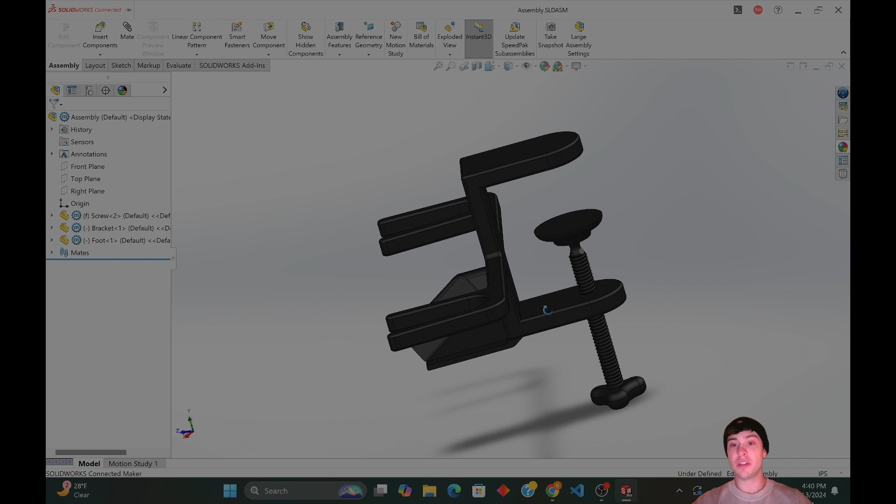If I start selling this, I want to refine the design so I can make these in larger volumes and not have to deal with individually sanding down different components. So, like this ball joint here, I'd change that from two separate pieces to one with support in between, and then in order to get that ball joint to articulate, I just snap the support so it's one piece. That optimizes the process so I don't have to manually install it. So those are kind of things that go on in the design and manufacturing engineering world.

So that's where we'll start off next time around. But I'm pretty happy with that. I'll run a test print and then we can check in with how it's doing and go from there.